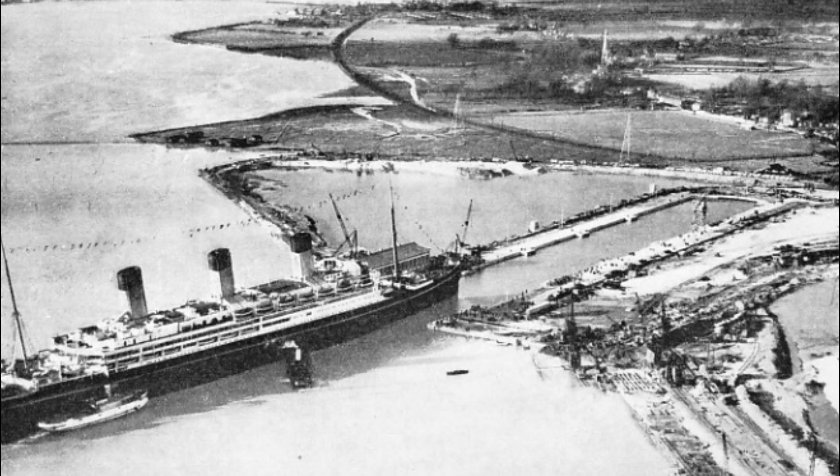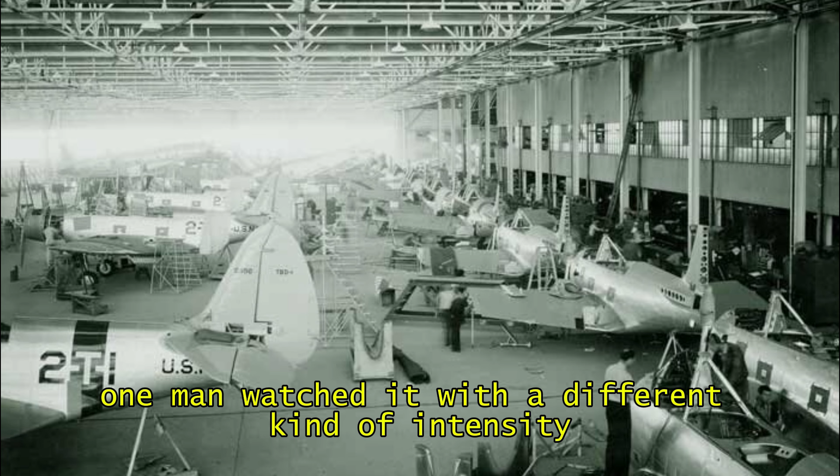Southampton, 1931. The tide was low along the River Itchen, and inside the Supermarine workshops a small crowd gathered around a sleek metal prototype resting on its trestles. The machine looked nothing like the biplanes dominating British airfields. Its wings seemed carved rather than assembled, its curves unusually clean, its structure almost arrogant in its simplicity. While visitors studied its unfamiliar shape, one man watched it with a different kind of intensity.

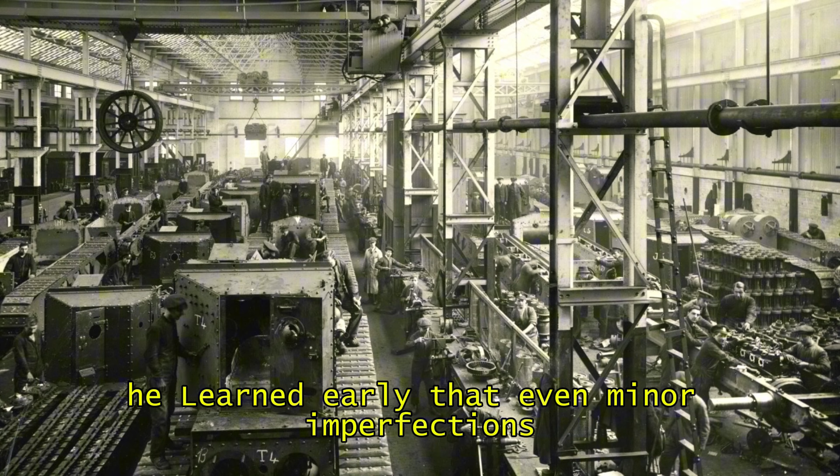R.J. Mitchell wasn't admiring a prototype. He was evaluating a future that few around him had even begun to imagine. Mitchell had already demonstrated that he understood speed better than most engineers of his generation. His seaplanes for the Schneider Trophy had torn across the water at record-breaking velocities, proving that aerodynamic discipline could defy expectations when applied without compromise. He learned early that even minor imperfections—a misaligned rivet, a poorly managed airflow transition, an unnecessary gram of weight—could turn victory into failure.

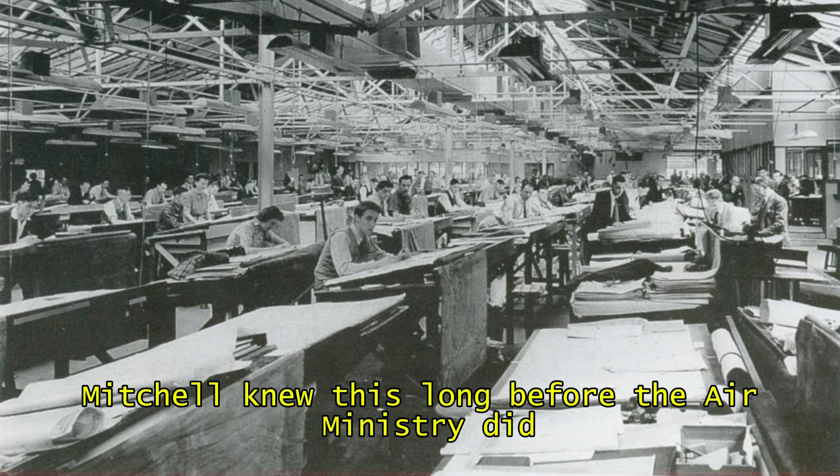These lessons shaped everything he designed, and by the early 1930s, Britain needed that mindset more urgently than ever. Aviation was shifting from wood and canvas biplanes to metal and engine physics. The next war would not wait for designers to catch up. Mitchell knew this long before the Air Ministry did. He was not an engineer who made decisions by instinct or emotion. To him, aircraft were problems expressed in three dimensions.

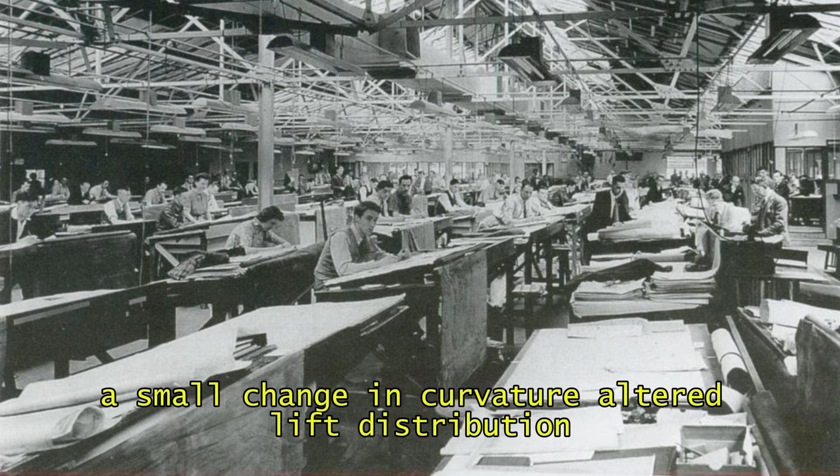A line drawn on a blueprint had consequences at full throttle. A small change in curvature altered lift distribution across an entire wing. A fraction of a degree in incidence made the difference between stability and disaster. Mitchell studied these relationships with the precision of a mathematician and the stubbornness of a craftsman who refused to accept good enough. He kept notebooks filled with airflow sketches, structural calculations, and handwritten annotations that revealed the mind of a man who trusted data more than promises.

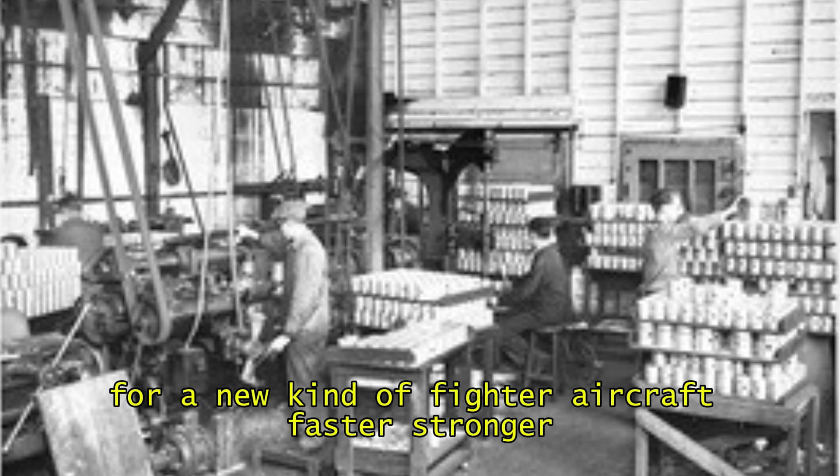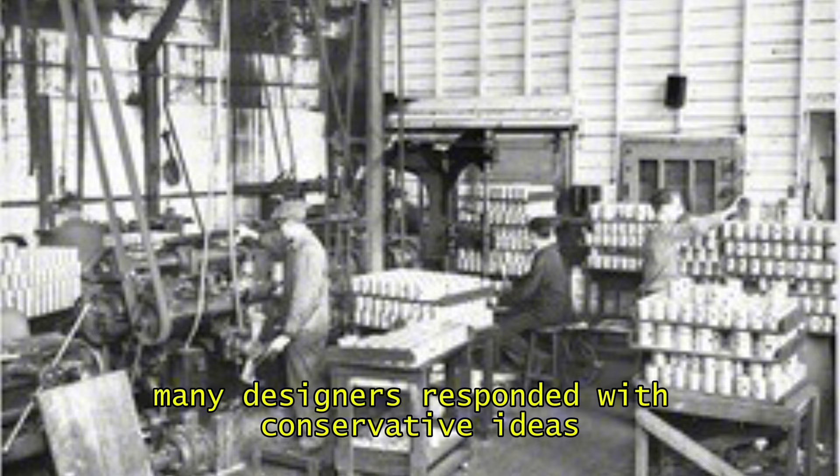He wasn't trying to outdesign other engineers. He was trying to outdesign the war he saw forming beyond the horizon. As tensions across Europe grew, the Air Ministry issued a requirement for a new kind of fighter aircraft—faster, stronger, able to climb rapidly, carrying sufficient firepower to challenge whatever Germany might produce. Many designers responded with conservative ideas, refining biplane concepts or proposing incremental improvements.

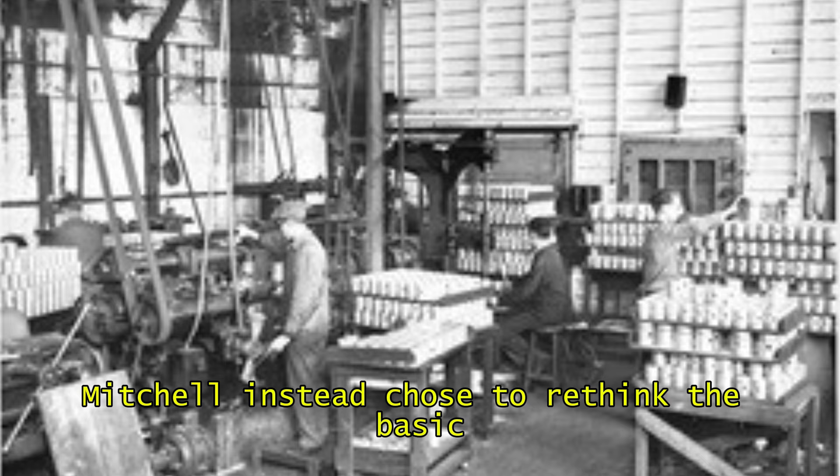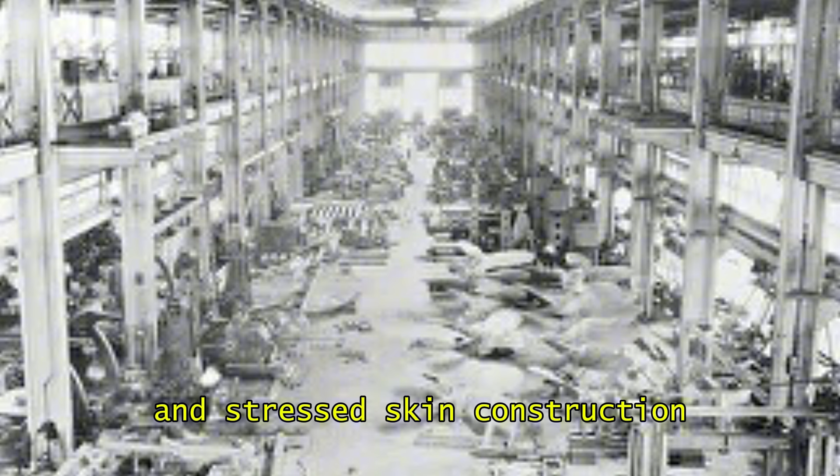Mitchell instead chose to rethink the basic geometry of the modern fighter. He studied low-drag fuselage forms, thin cantilever wings, retractable landing gear, and stressed skin construction. No single element was revolutionary on its own, but the combination hinted at a leap that Britain had never attempted in a military aircraft. Mitchell's early sketches showed wings that curved with deliberate precision, a fuselage tapering smoothly around its engine, and structural elements distributed to minimize unnecessary mass.

He was obsessed with airflow behavior at high speeds. He understood that drag was the enemy of performance, and his approach focused on eliminating every surface that didn't contribute directly to lift, stability, or cooling. He often arrived at the factory before sunrise, reviewing test results and making adjustments that seemed microscopic to casual observers, but transformed handling during flight.

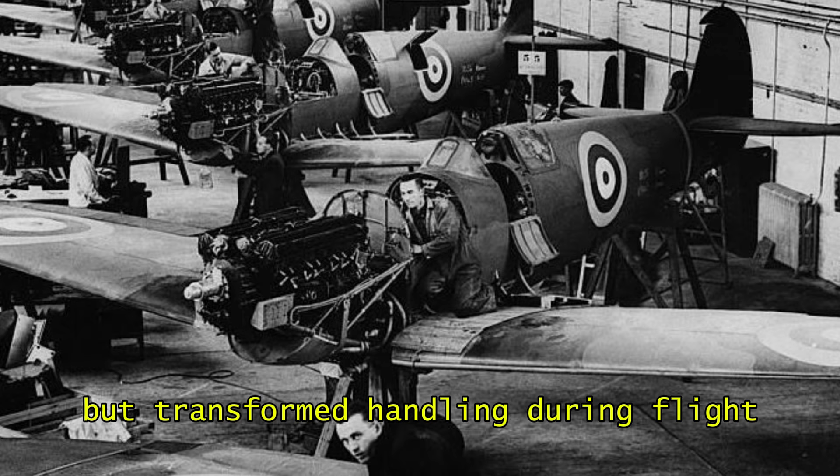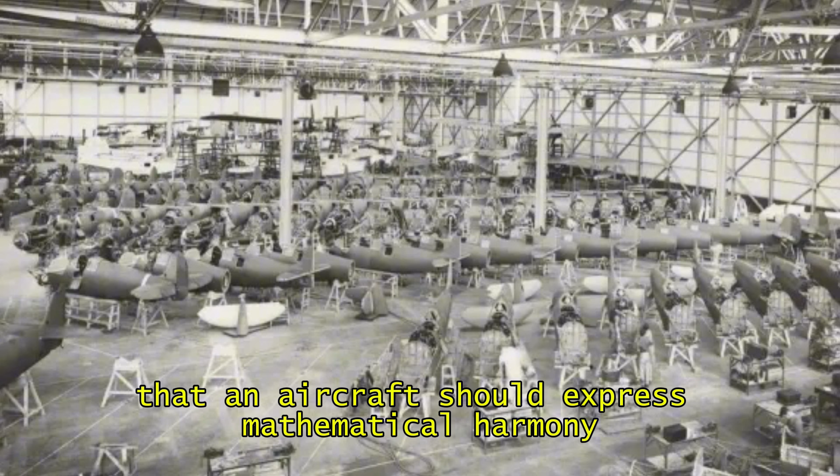Draftsmen described him as calm, focused, and methodical—a man who believed that an aircraft should express mathematical harmony when viewed from any angle. Even at this early stage, Mitchell sensed that Britain would need an aircraft capable of rising quickly into the path of incoming bombers, engaging escort fighters, and returning home with enough strength left to fight again the next day. Speed alone wasn't enough.

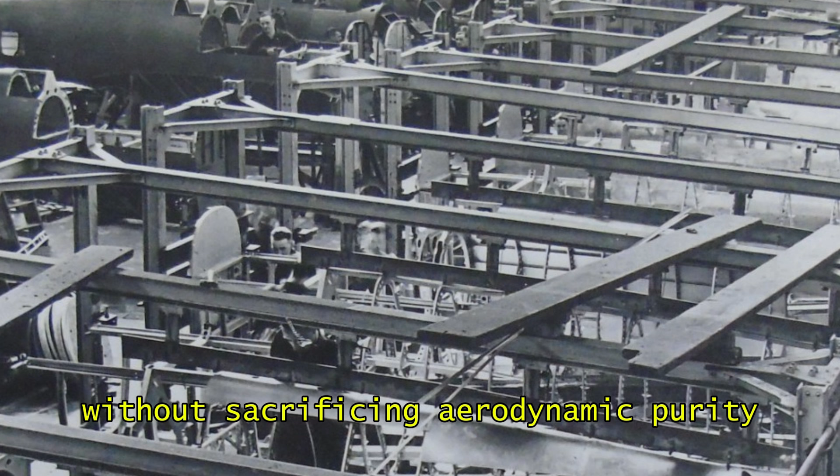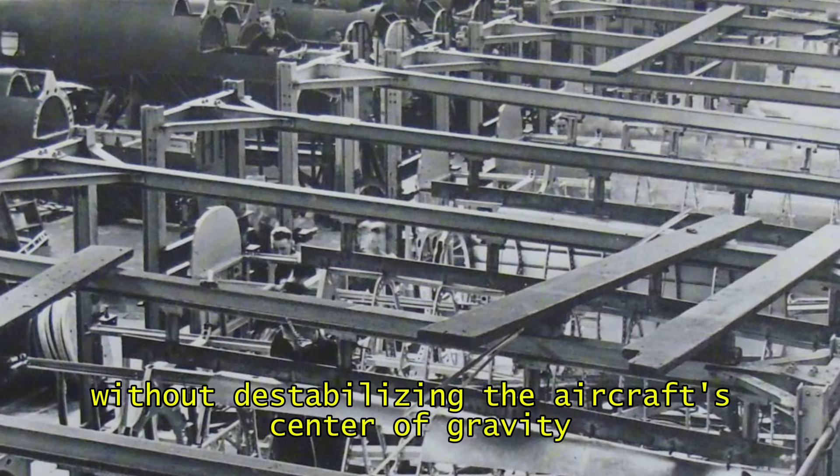The design needed structural honesty, the ability to withstand combat stress without sacrificing aerodynamic purity. Mitchell experimented with monocoque fuselage construction, new wing spars, and layouts intended to support heavy armament without destabilizing the aircraft's center of gravity. Every refinement brought him closer to a fighter that could change the balance of power in European airspace. Inside Supermarine, engineers began to notice that Mitchell's blueprints had a coherence absent from many contemporary designs. His aircraft didn't blend features from various sources.

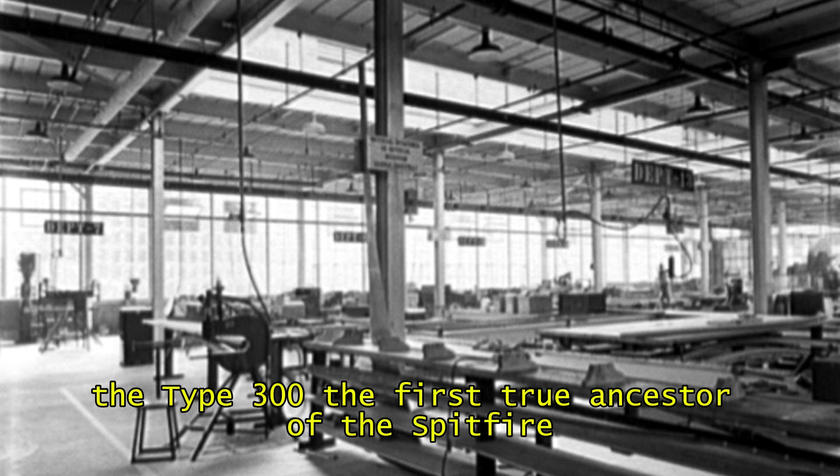They evolved logically from the physics he studied. When a test revealed a flaw, he corrected the geometry directly rather than compensating with patches or external additions. His aircraft weren't built through compromise. They were built through deliberate choice. This commitment to clarity would soon evolve into a machine that captured the attention of the Air Ministry—the Type 300, the first true ancestor of the Spitfire.

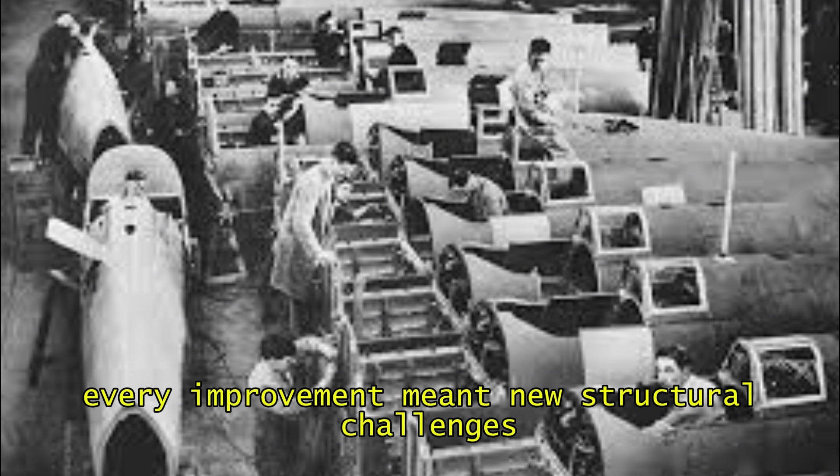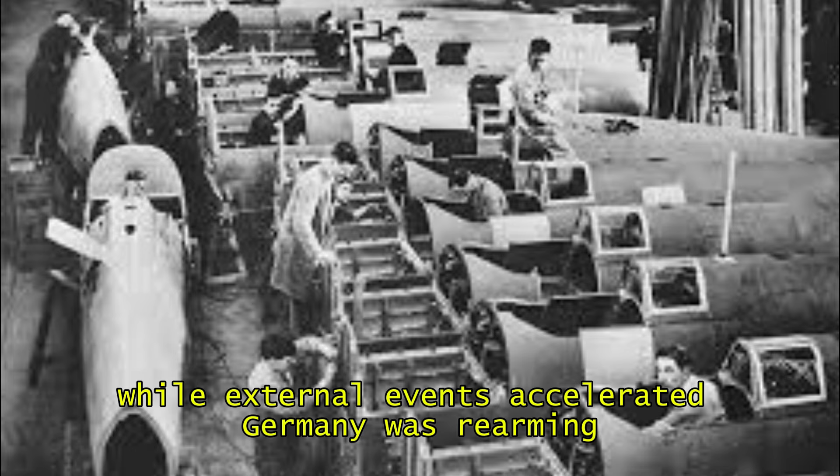But Mitchell also understood the cost of innovation. Every improvement meant new structural challenges, new stress calculations, and tighter margins for error. His team worked under pressure, refining the prototype while external events accelerated. Germany was rearming, and British intelligence warned of fighters and bombers designed with increasing sophistication.

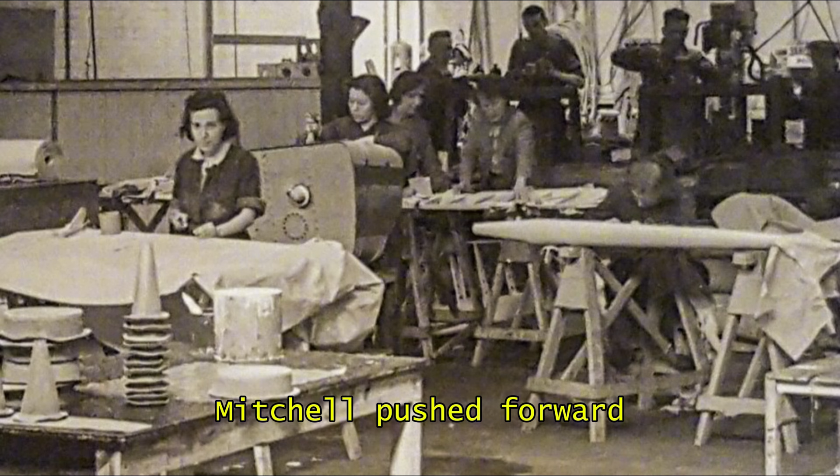Time was becoming a resource Britain could not replace. Mitchell pushed forward, balancing ambition with discipline, knowing that a future conflict would be decided in minutes of combat, shaped by years of engineering. As the final lines of the Type 300 took form, one question defined the next stage of his work. Could Mitchell's pursuit of aerodynamic precision deliver an aircraft capable of meeting the war Britain feared was coming? What breakthrough would transform his promising prototype into the fighter that would carry Britain through its darkest hour?

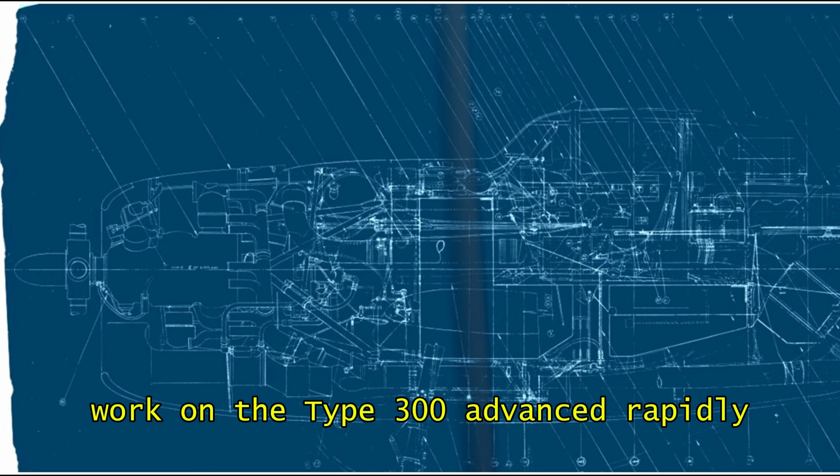Work on the Type 300 advanced rapidly, but the prototype still existed only as a sequence of evolving blueprints, stress diagrams, and airflow studies pinned across Mitchell's office walls. He knew the concept was promising, yet promise alone would not convince the Air Ministry.

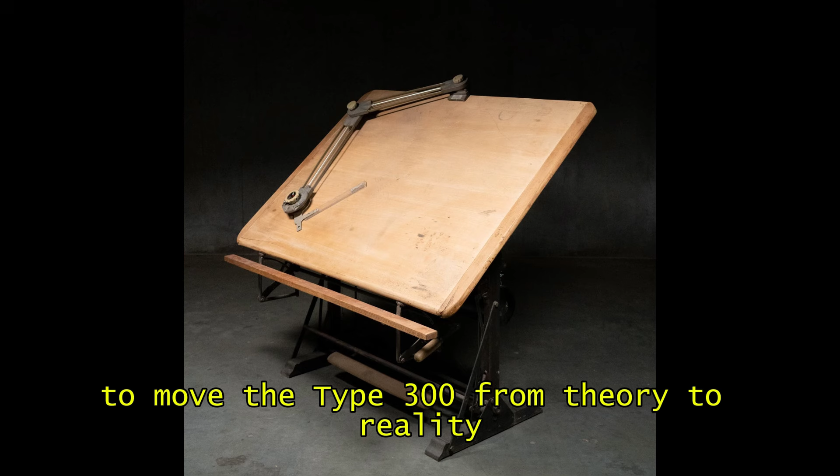Britain was in a transitional moment. Older aircraft were becoming obsolete overnight, and new designs carried risks that frightened conservative planners. For Mitchell to move the Type 300 from theory to reality, he needed to refine every aspect of the design until its purpose became undeniable.

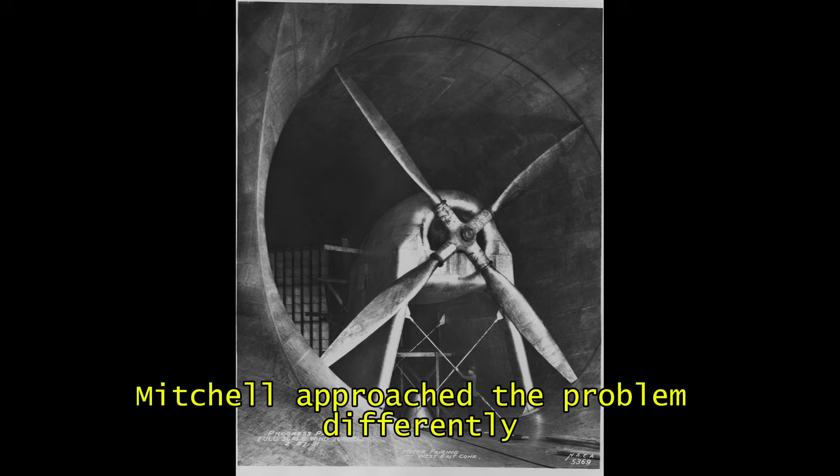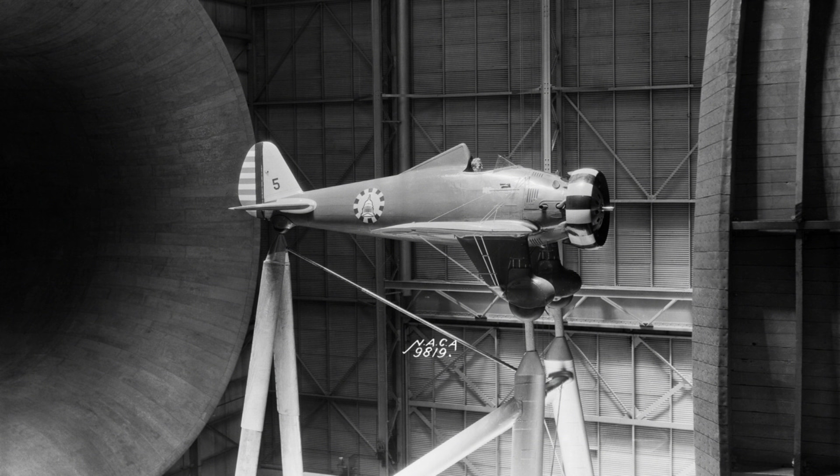His first focus was the wing. Most European fighters relied on thick, straight-edged designs that offered stability but sacrificed speed. Mitchell approached the problem differently. He shaped the wing like a curve drawn in a single uninterrupted motion, its thickness tapering smoothly from root to tip. This elliptical form was not aesthetic, it was mathematical.

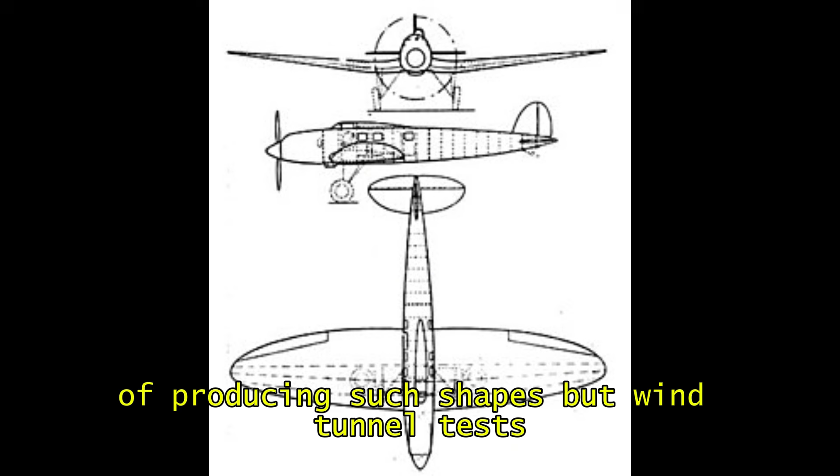It reduced induced drag, distributed lift more evenly, and allowed the aircraft to maneuver without the abrupt stalls common in many fighters of the era. Engineers studying the drawings initially questioned the practicality of producing such shapes, but wind tunnel tests confirmed that Mitchell's instinct was correct. The design promised higher efficiency during tight turns and reduced resistance during high-speed flight, giving the prototype a performance advantage before a single engine ever turned.

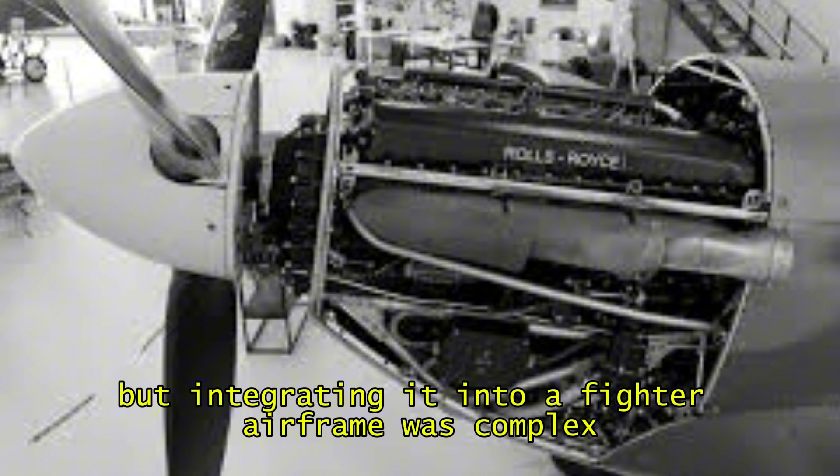Next came the challenge of housing the power plant. The new Rolls-Royce Merlin engine offered extraordinary potential, but integrating it into a fighter airframe was complex. Cooling, vibration, airflow intake, and weight distribution had to work in perfect harmony.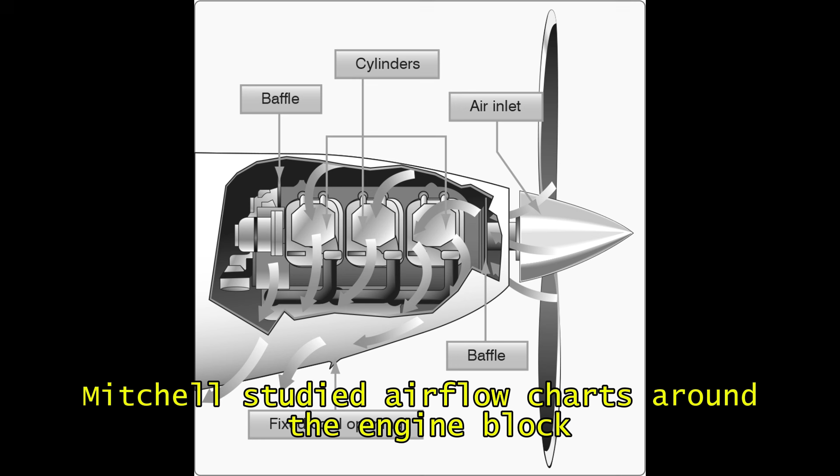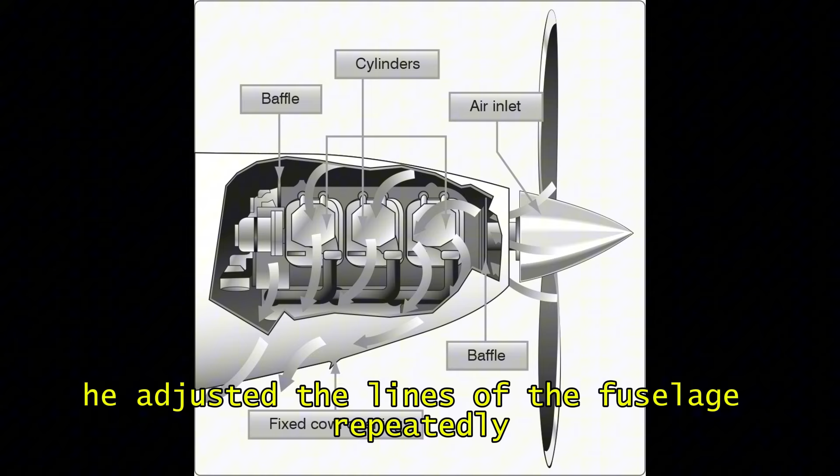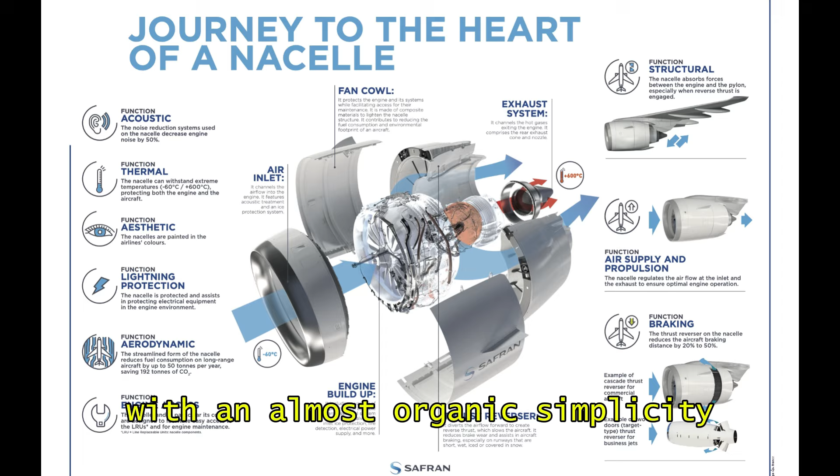Mitchell studied airflow charts around the engine block, observing how pressure fields shifted with minor changes to the cowling's curvature. He adjusted the lines of the fuselage repeatedly, ensuring that the Merlin's power translated into usable speed rather than wasted turbulence. His design integrated the engine with an almost organic simplicity, reducing drag at the nose and creating a smooth transition into the aircraft's body.

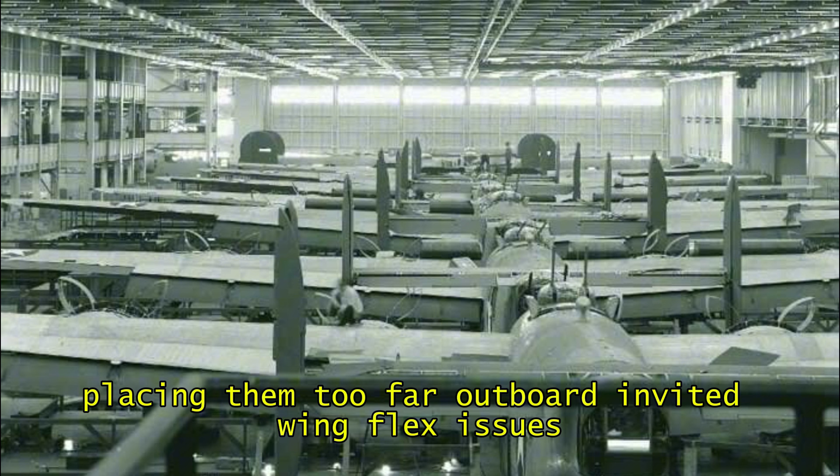Mitchell also recognized that speed without firepower was meaningless. The Air Ministry required 8 machine guns mounted in the wings, a configuration that imposed both structural and aerodynamic complications. Mounting the guns too close to the fuselage risked destabilizing recoil forces. Placing them too far outboard invited wing flex issues.

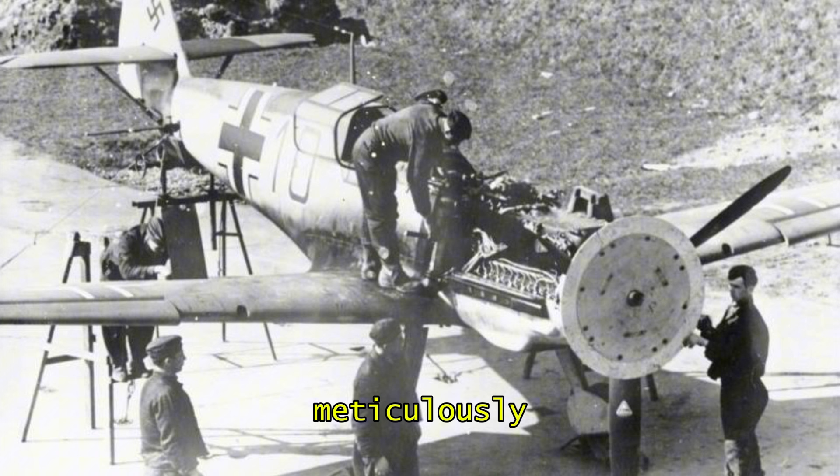Mitchell calculated the precise points where the wing spar could support the weight without compromising rigidity. The gun ports were aligned along airflow paths, optimized to prevent excessive drag. Even the placement of ammunition boxes was evaluated meticulously, with diagrams mapping how weight would shift as rounds were expended during combat. While the technical work intensified, the broader environment around Supermarine grew increasingly urgent.

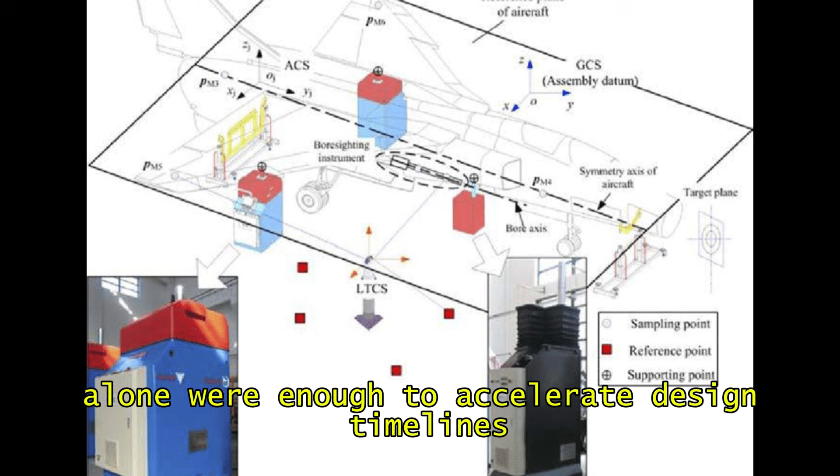Intelligence reports indicated that Germany was producing fighters with advanced engines and all-metal airframes. No one yet knew the capabilities of the Bf 109, but rumours alone were enough to accelerate design timelines. Mitchell responded by tightening the development cycle.

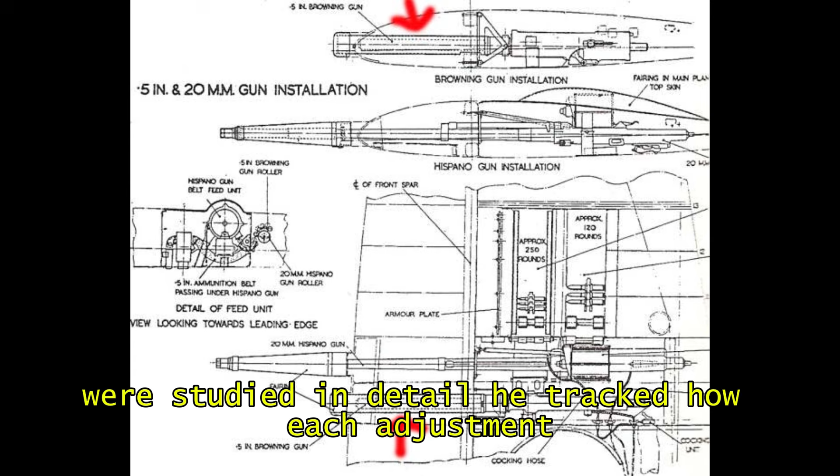Test components were fabricated quickly and inspected with uncompromising standards. Structural frames were assembled and disassembled repeatedly, as material limits were studied in detail. He tracked how each adjustment influenced the aircraft's centre of gravity, lift characteristics, and stress distribution during high-load manoeuvres.

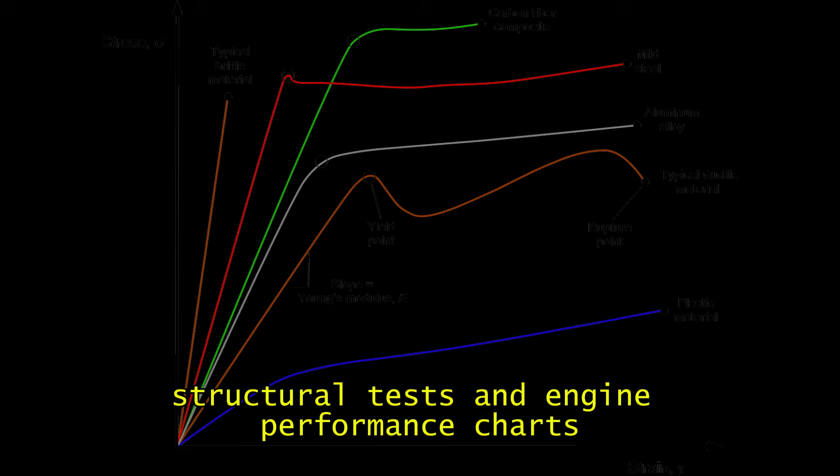Despite the pressure, Mitchell avoided shortcuts. His approach was systematic, grounded in evidence rather than speculation. When a design question emerged, he consulted wind tunnel data, structural tests, and engine performance charts until the answer revealed itself through numbers rather than opinion. Draftsmen recalled that he often worked late into the night, pencil marks accumulating across revised drawings until the geometry reached a state he considered honest.

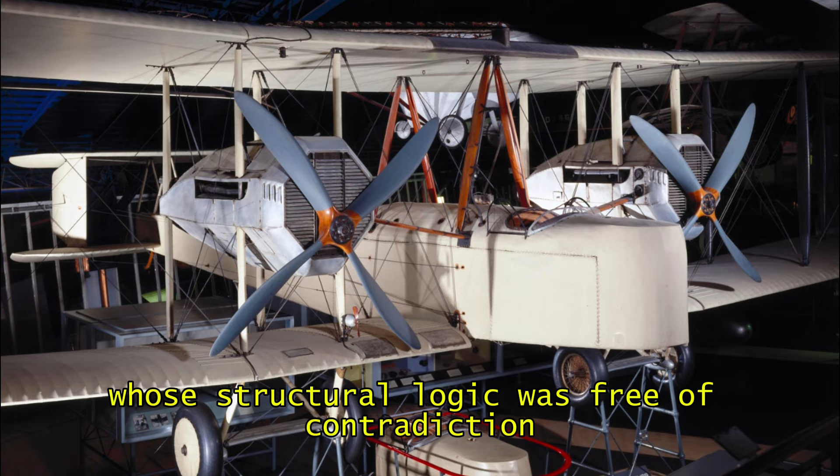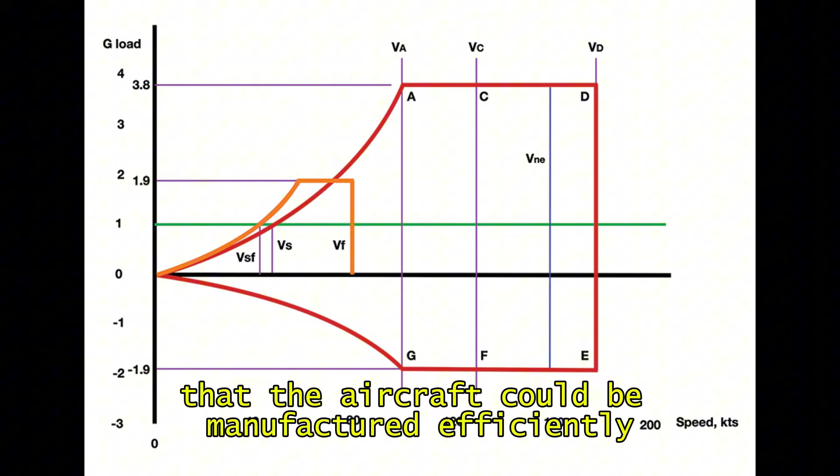He used that word often to describe an aircraft whose structural logic was free of contradiction. As the prototype neared approval, Mitchell understood that innovation alone would not secure the Air Ministry's support. He needed to demonstrate that the aircraft could be manufactured efficiently and maintained under operational strain.

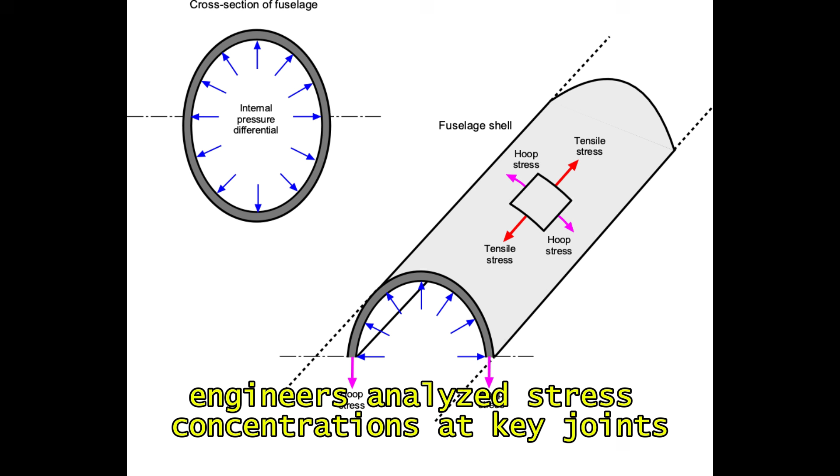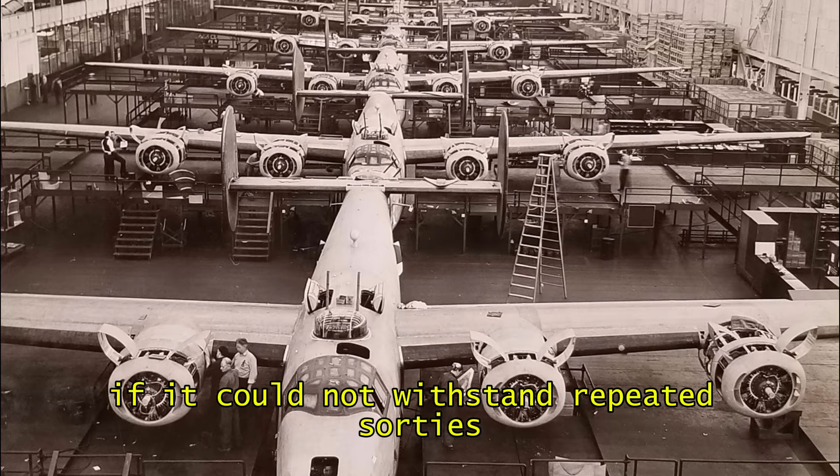He reviewed rivet patterns, simplified access panels, and optimized the internal structure for rapid repair. Engineers analyzed stress concentrations at key joints, reinforcing them without adding unnecessary weight. Mitchell believed that a fighter's performance meant little if it could not withstand repeated sorties and absorb battle damage without catastrophic failure.

The Type 300 was designed not only to excel in controlled tests, but to survive the unpredictable reality of war. By mid-1934, the aircraft's design reached a level of coherence that impressed even skeptical officials. The Air Ministry recognised that the prototype represented more than incremental progress. It was a leap into a new generation of fighter architecture.

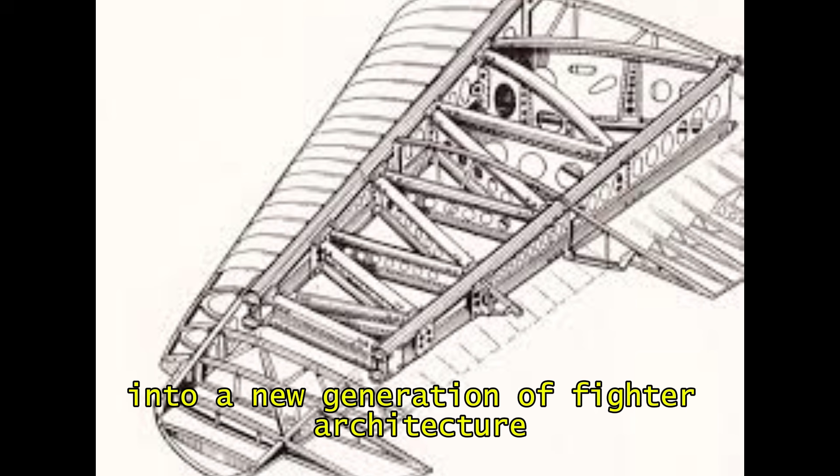The combination of the Merlin engine, the elliptical wing, and Mitchell's aerodynamic refinements produced a profile unmatched by anything currently flying under British colours. Approval for the first prototype was granted, marking a turning point in the project. Construction began soon after, and momentum shifted from theoretical perfection to practical engineering.

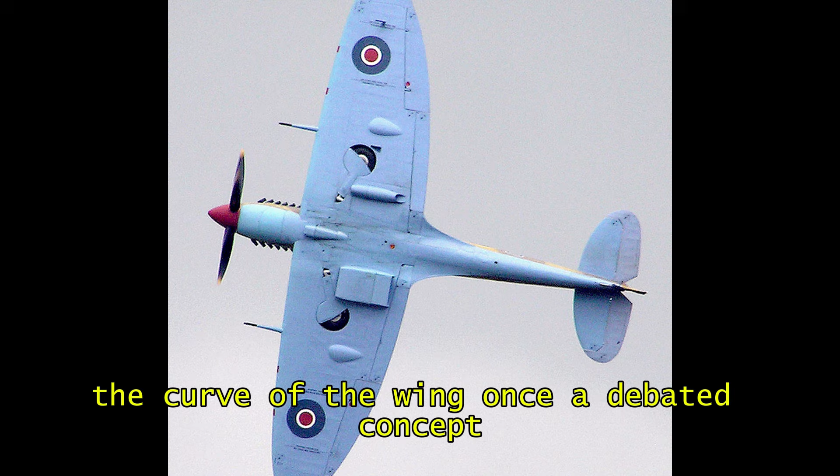Frames were assembled on the workshop floor. Sheets of metal were shaped and riveted into position. The curve of the wing, once a debated concept, became a tangible structure stretching across the hangar.

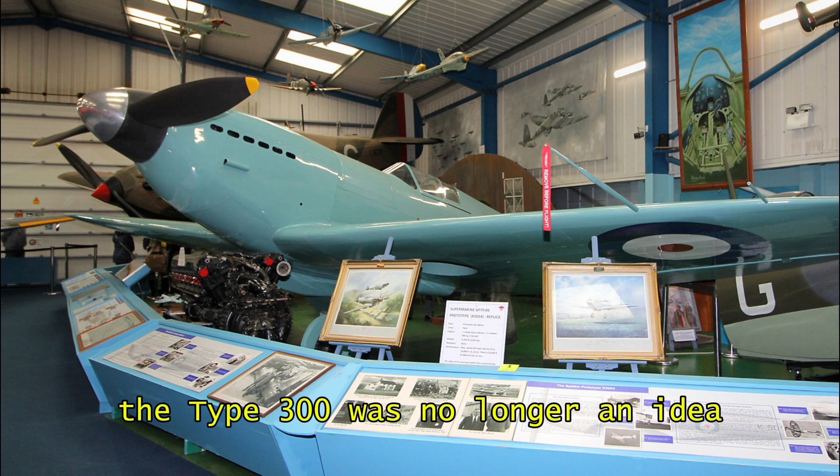Mitchell supervised every stage, observing the alignment of spars, inspecting control surfaces, and confirming that the manufactured components remained faithful to his calculations. The Type 300 was no longer an idea. It was becoming a physical machine, capable of challenging the emerging threats across Europe.

Yet, even as the aircraft took shape, Mitchell knew the greatest tests still lay ahead. Once it entered the air, every assumption, every calculation, and every decision would face scrutiny from the unforgiving physics of flight. What challenges would the prototype encounter once it lifted from the runway and met the sky for the first time?

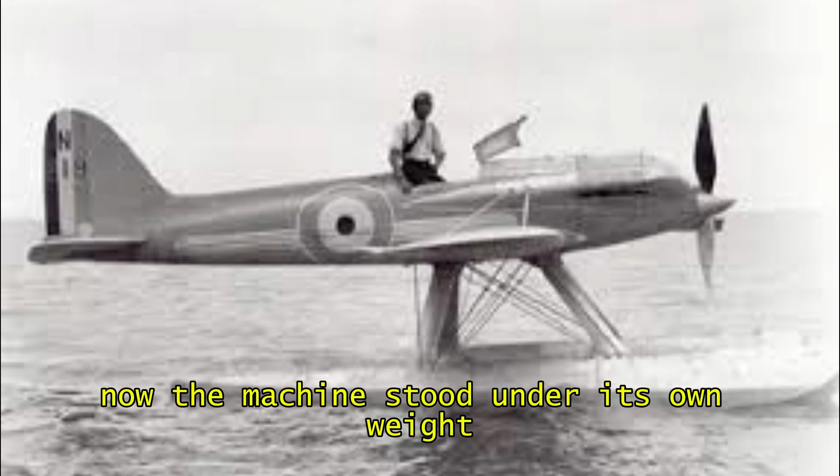The first prototype of the Type 300 rolled out onto the tarmac, with a sense of anticipation that spread across the Supermarine team. For months, the design had lived only in diagrams, airflow charts, and Mitchell's relentlessly revised sketches. Now the machine stood under its own weight, metal skin shimmering under the morning light, its elliptical wings stretching outward, like a promise waiting to be tested.

The moment the wheels touched the runway for trials, engineering moved from theory into the unforgiving realm of flight. Early tests revealed exactly why Mitchell refused to rely on instinct alone. The aircraft demonstrated impressive speed, but handling required refinement. Control forces at high velocity felt heavier than predicted, and airflow separation along the wing roots appeared earlier than wind tunnel data suggested. Pilots reported that the aircraft climbed quickly but demanded precise inputs to maintain stability during tight turns.

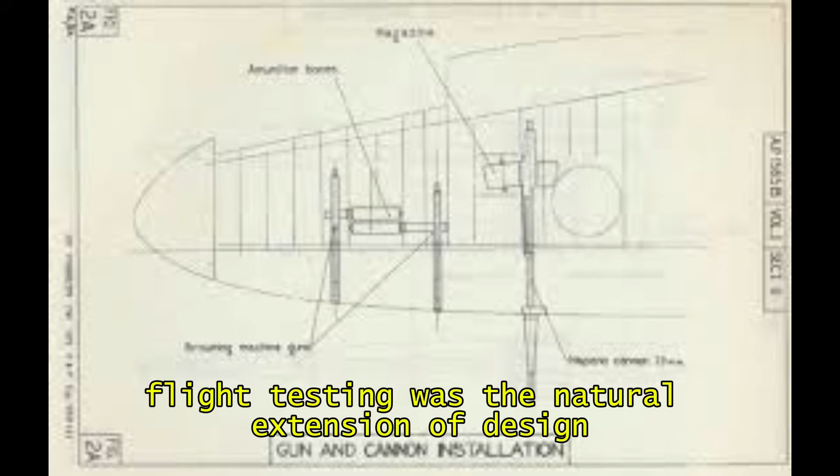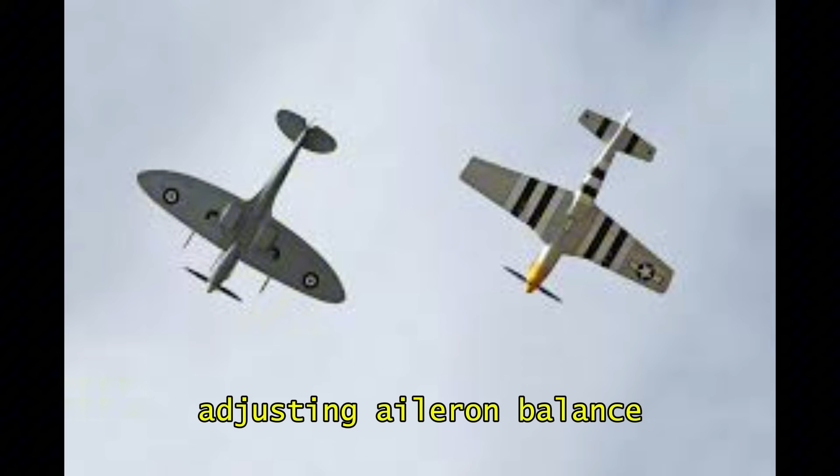For Mitchell, none of this was discouraging. Flight testing was the natural extension of design, the moment where numbers met reality. He returned to the workshop with renewed focus, revising control linkages, adjusting aileron balance, and narrowing gaps between surfaces to eliminate unnecessary turbulence. The Merlin engine brought its own set of challenges.

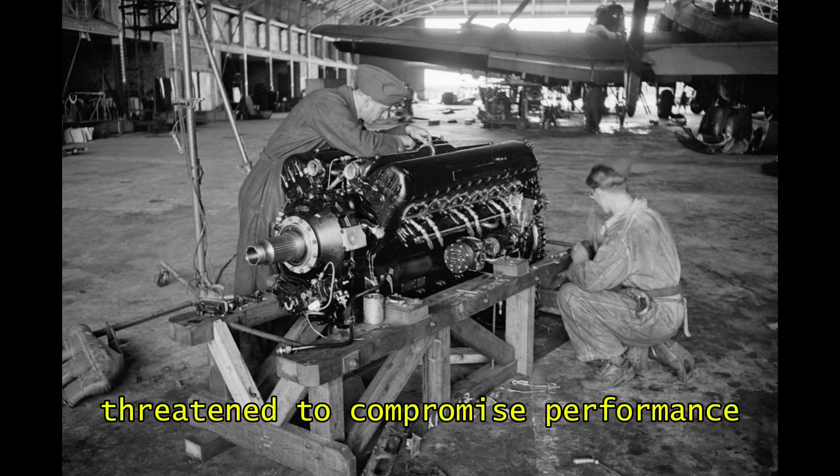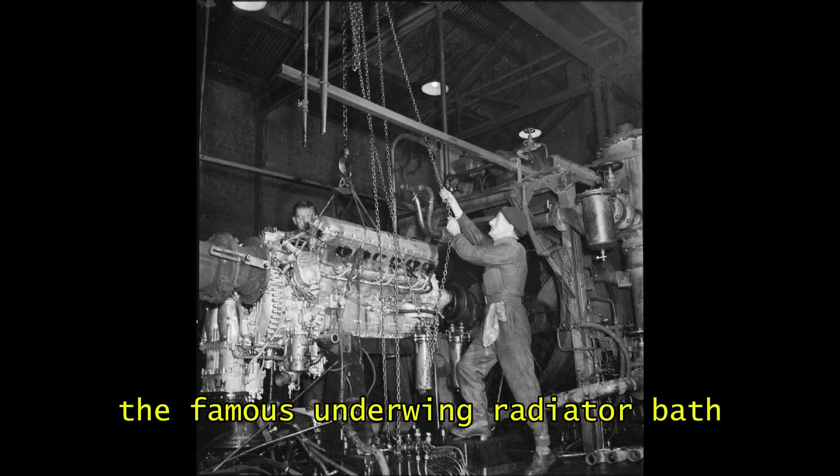Its power was essential, but heat build-up during extended climbs threatened to compromise performance. Mitchell studied temperature profiles across the fuselage, working with Rolls-Royce to reshape coolant inlets and reposition radiators to maintain efficiency without adding drag. The famous underwing radiator bath, later recognized as a hallmark of the Spitfire's silhouette, evolved from these experiments. Its shape balanced cooling requirements with aerodynamic cleanliness, turning a functional necessity into a performance advantage.

Each test flight returned with new data. Engineers charted vibration frequencies, stress variations across the wing spars, and pressure differentials along the fuselage. Mitchell checked every curve against his original models. When discrepancies appeared, he traced the source with methodical patience.

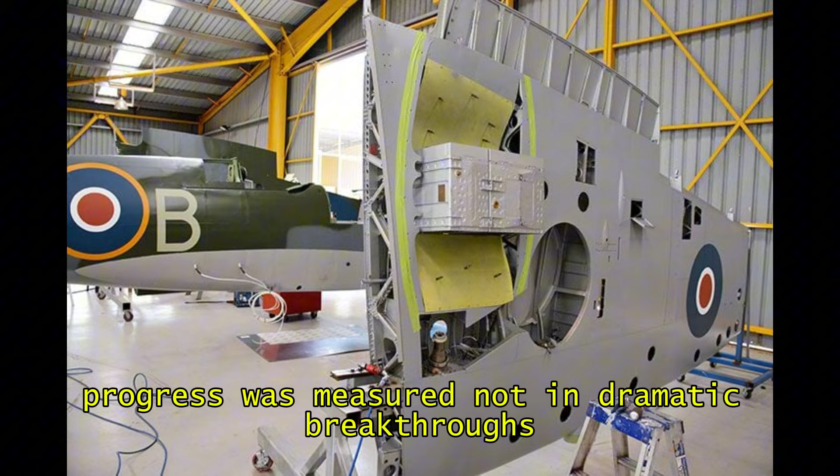A slight flutter at high speed led to adjustments in trailing edge stiffness. A minor yaw tendency during rapid throttle changes triggered a re-evaluation of tail geometry. Progress was measured not in dramatic breakthroughs, but in steady, disciplined refinement, the process that defined all of Mitchell's most successful designs.

As the prototype matured, political urgency intensified. Reports from the continent indicated that Germany had fielded the Messerschmitt Bf 109, a fighter with advanced aerodynamics and a powerful inline engine. Britain needed a competitor, and it needed it quickly.

The Air Ministry monitored the Type 300's progress with growing interest, pushing for accelerated development without sacrificing reliability. Mitchell understood the pressure but refused to compromise structural integrity for speed. A fighter that excelled on paper yet failed under operational strain would serve no purpose.

His aim was not to surpass the enemy for a few months. It was to give Britain a design that could evolve throughout the war.

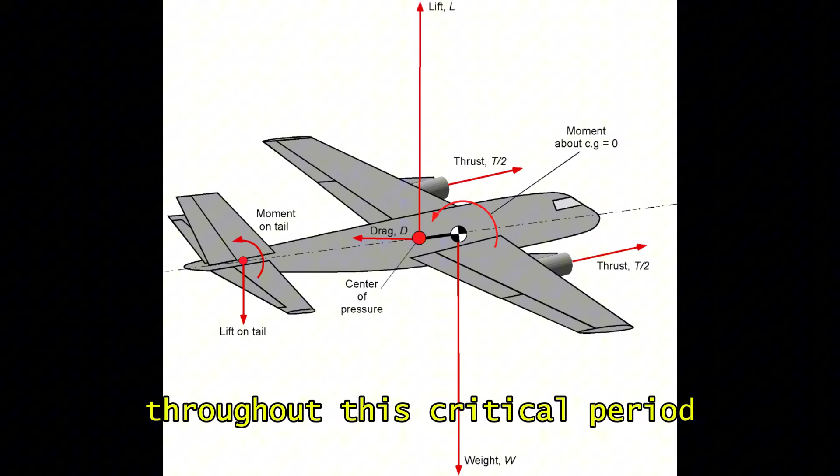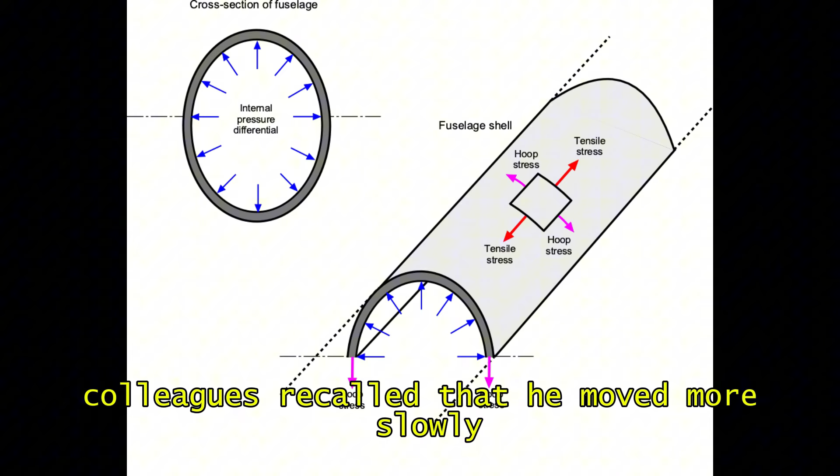Throughout this critical period, Mitchell's health began to deteriorate. A diagnosis he had kept private from most colleagues now cast a shadow over his work. Pain made long hours more demanding, yet he continued to oversee tests, review engineering revisions, and guide every refinement. Colleagues recalled that he moved more slowly but with the same intensity in his eyes.

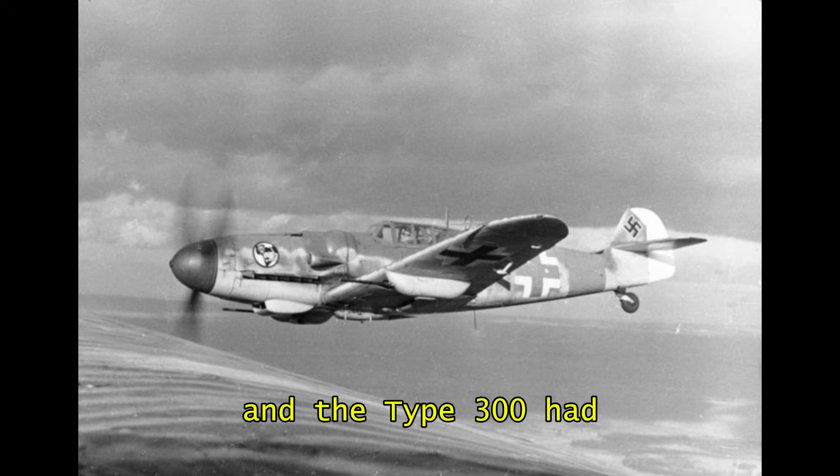Engineering was not simply his profession. It was the structure through which he viewed the world, and the Type 300 had become the culmination of that vision. Even as treatment and fatigue limited him, his presence in the workshop remained constant.

The aircraft improved with each iteration. Its turn performance sharpened, its climb rate increased, and its high-speed behaviour stabilised. Mitchell focused particularly on the harmony between engine, wing, and control surfaces, a triad he believed defined all great fighters.

Test pilots began reporting impressions that hinted at something rare, a machine that was not only fast, but intuitive, responsive, almost instinctive to fly. Mitchell viewed these comments cautiously. He preferred numbers to impressions, but the emerging picture aligned with his predictions. The design was reaching a point of equilibrium where aerodynamic efficiency and mechanical reliability supported one another instead of competing.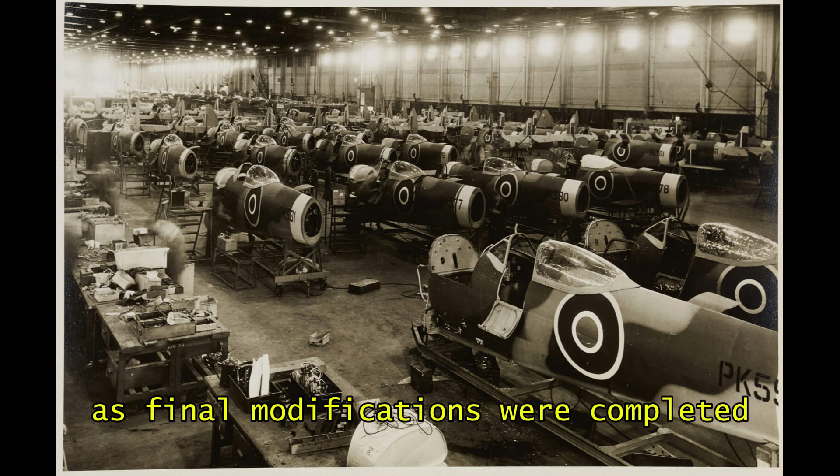As final modifications were completed, Supermarine prepared for official trials. The Type 300 faced assessments that measured structural strength, agility, stability under various loadouts, and high-altitude performance. Mitchell observed from the sidelines, watching the aircraft he had shaped through years of disciplined work rise into the sky with purpose.

Trials confirmed what his calculations had suggested. The prototype exhibited exceptional potential. It accelerated cleanly, maintained energy in sustained climbs, and delivered firing stability superior to competing British designs.

Yet for Mitchell, success was not defined by tests alone. He evaluated the aircraft's ability to adapt to future improvements. Could the airframe accept new engines? Could the wing structure support increased armament? Could the fuselage handle rapid manufacturing under wartime conditions? These questions mattered as much as raw performance.

Britain needed a fighter that would not only win the opening battles, but continue evolving as the conflict escalated. The Type 300 offered that flexibility.

As approval moved closer, the true transition began. The prototype would soon leave the stage of concept validation and enter the demanding world of full-scale production. Factories, supply lines, material planning, and workforce expansion would now determine the aircraft's future.

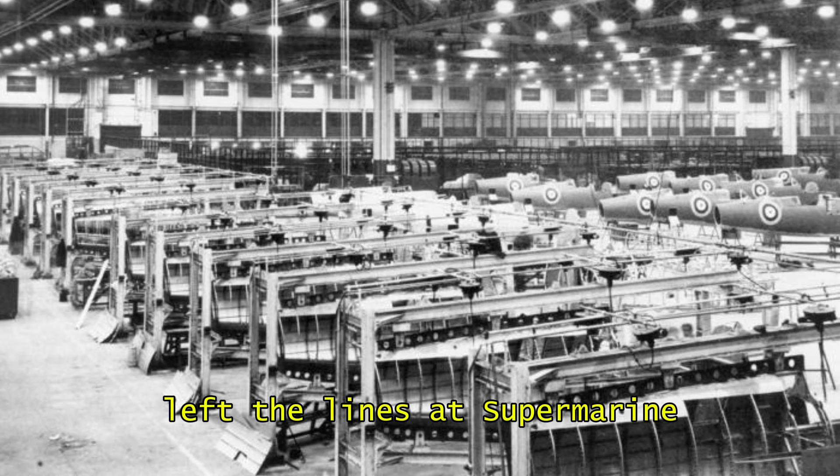When the first production models of the Spitfire left the lines at Supermarine, Britain stood on the threshold of a conflict that would test every assumption behind Mitchell's work.

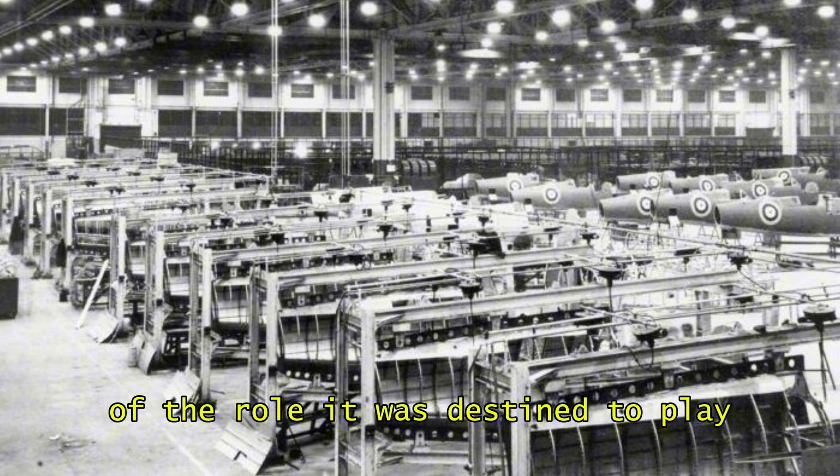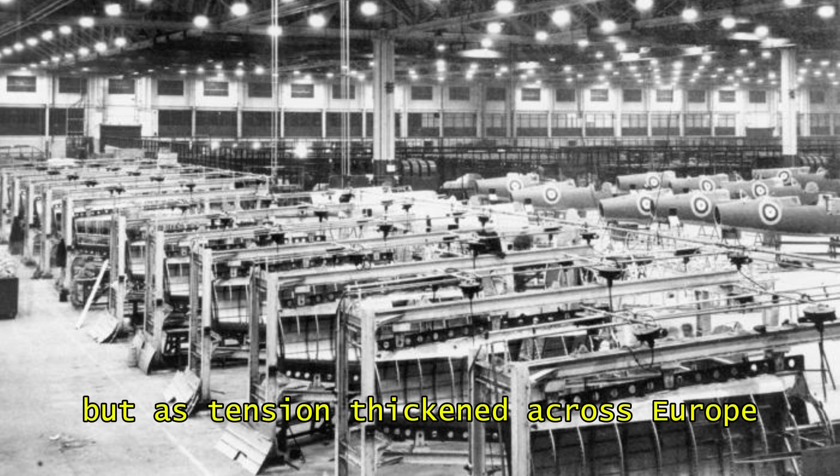The aircraft entered service quietly, with no grand announcements and no immediate recognition of the role it was destined to play. Pilots trained, ground crews adapted to the new structure, and engineers studied how the machine behaved under operational strain. But as tension thickened across Europe and war finally erupted, the Spitfire's true value began to emerge.

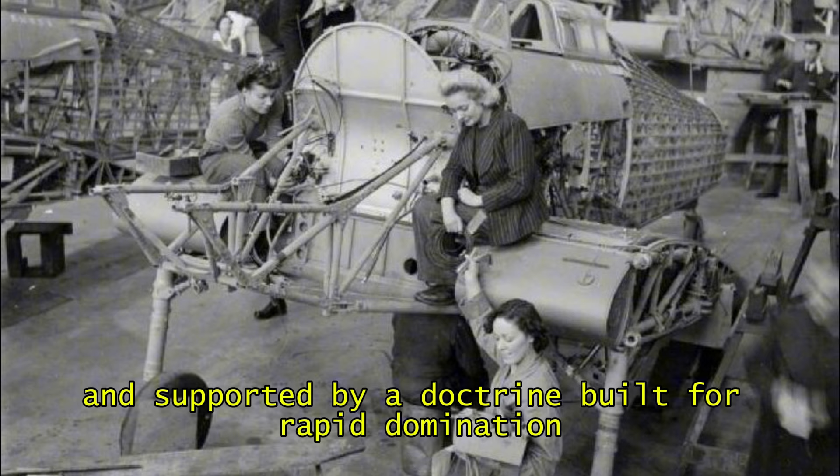Germany's fighters were fast, aggressive, and supported by a doctrine built for rapid domination. Britain needed a machine capable of meeting that challenge head-on, and Mitchell's design prepared the RAF in ways few fully understood. The Spitfire distinguished itself first not by raw speed, but by the precision of its aerodynamic balance.

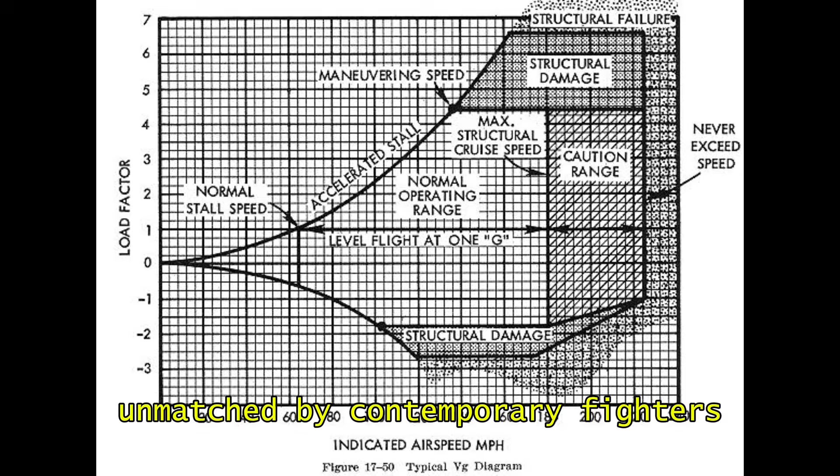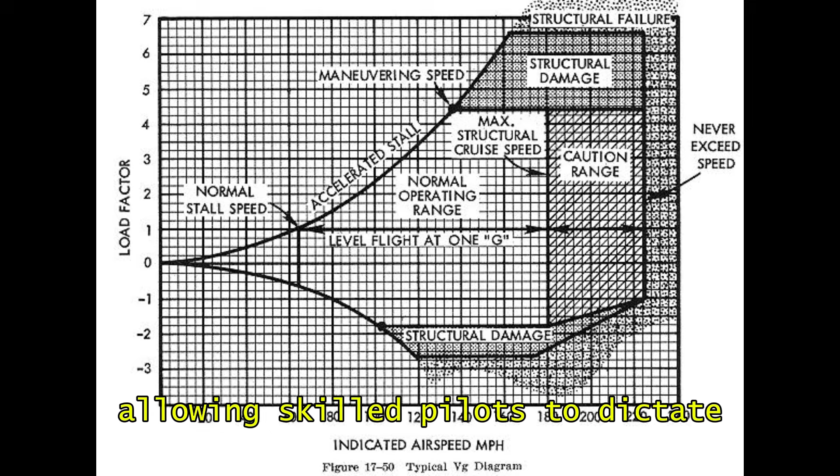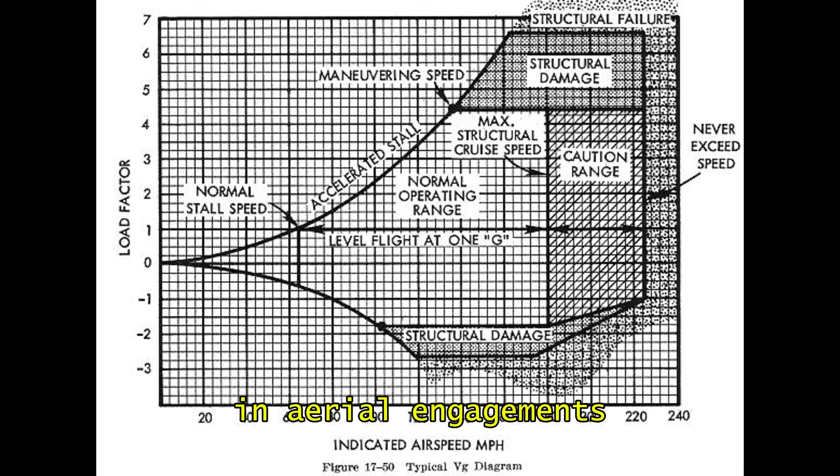Pilots discovered that the elliptical wing delivered a turning performance unmatched by contemporary fighters. Whereas many aircraft lost stability during aggressive maneuvers, the Spitfire maintained control, allowing skilled pilots to dictate the geometry of combat. Energy retention during climbs proved exceptional, enabling rapid altitude changes that determined life or death in aerial engagements. These traits were not accidental.

They were the direct result of Mitchell's disciplined approach. The wing's geometry, the fuselage's curvature, and the distribution of internal structure converged to create a fighter that translated theoretical predictions into battlefield advantage.

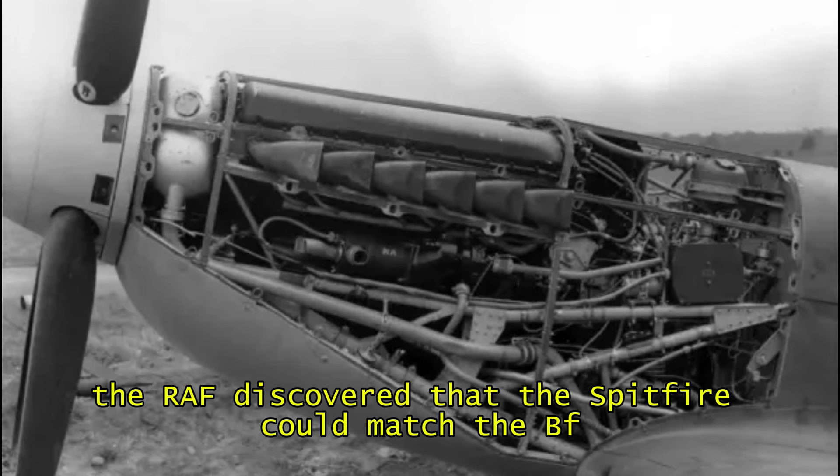As the Luftwaffe advanced through Western Europe, news of the Bf 109's combat effectiveness spread quickly. German fighters dominated the skies over Poland and France, and many analysts feared Britain would face the same fate. But when British and German aircraft finally met over the Channel, the RAF discovered that the Spitfire could match the Bf 109 in speed and surpass it in manoeuvrability.

The Merlin engine provided strong acceleration, while the aircraft's aerodynamic purity allowed pilots to hold tighter turns and recover energy more efficiently. Even the visibility from the cockpit, something Mitchell had refined through careful shaping of the canopy and fuselage, gave pilots an edge during fast-paced engagements.

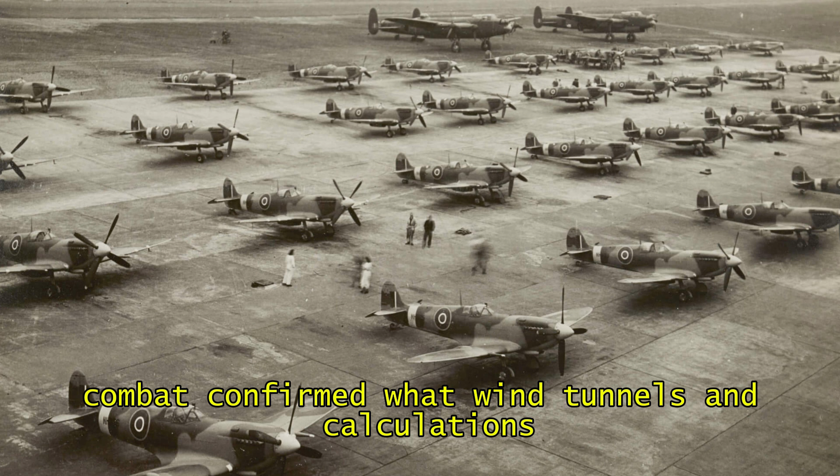Combat confirmed what wind tunnels and calculations had suggested. Mitchell's fighter operated as a coherent whole, each component supporting the others with rare consistency.

But the Spitfire's impact extended beyond one-against-one encounters. Its structure proved resilient under stress, allowing ground crews to repair damage quickly and return aircraft to service. The airframe accommodated incremental modifications without losing performance, enabling engineers to introduce new radiators, armament adjustments, and engine upgrades as the war evolved. This adaptability was critical.

Germany refined its aircraft continuously, and the RAF needed a platform capable of matching that pace. Mitchell had not lived to see the war unfold, but his insistence on structural honesty, designing an airframe that could withstand refinement rather than break under it, ensured that the Spitfire remained competitive through every phase of the conflict.

During the Battle of Britain, the world witnessed the full weight of Mitchell's achievement. German bombers swept across the Channel with fighter escorts designed to overwhelm British defences. Yet the Spitfire's climb rate, turn radius, and overall responsiveness allowed RAF pilots to intercept and challenge the enemy before they reached their targets.

While the Hurricane bore the bulk of bomber interceptions, the Spitfire neutralised the Bf-109 threat, preventing German fighters from achieving air superiority.

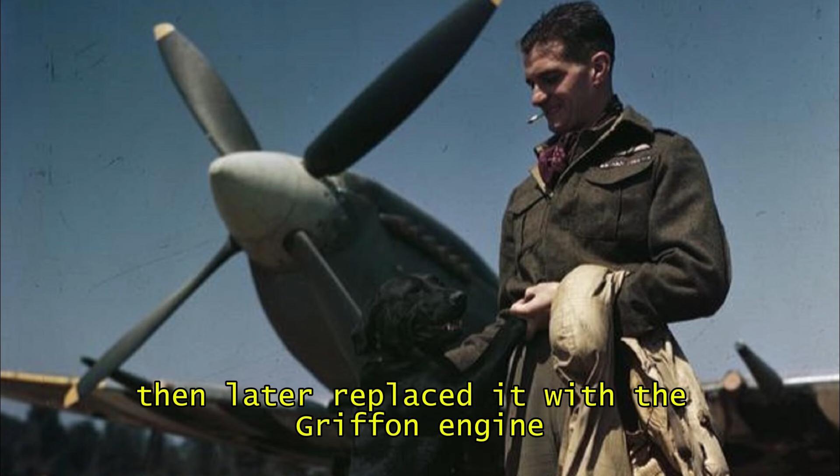As the war progressed, the Spitfire continued to evolve. Engineers introduced more powerful Merlin variants, then later replaced it with the Griffon engine, significantly increasing thrust and high-altitude performance. The airframe absorbed these changes without losing its defining qualities.

Wing modifications allowed the installation of cannons, clipped configurations improved roll rate, and reconnaissance versions reached altitudes beyond the reach of enemy fighters. Each iteration reflected Mitchell's original design philosophy: build a fighter with the structural integrity to grow, adapt, and meet challenges unknown at the time of creation.

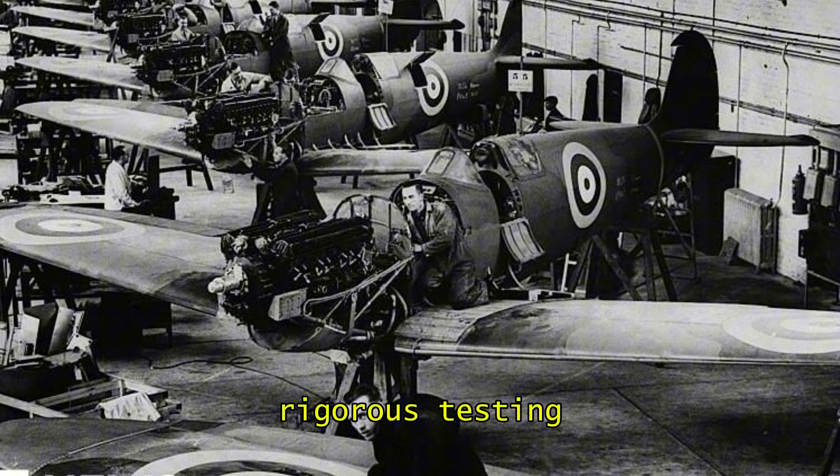Behind the scenes, engineers often acknowledged that the Spitfire felt engineered with foresight uncommon in military aviation. Mitchell's approach, combining aerodynamic theory, rigorous testing, and an uncompromising pursuit of balance, produced a machine that never stopped being relevant, even as technology accelerated.

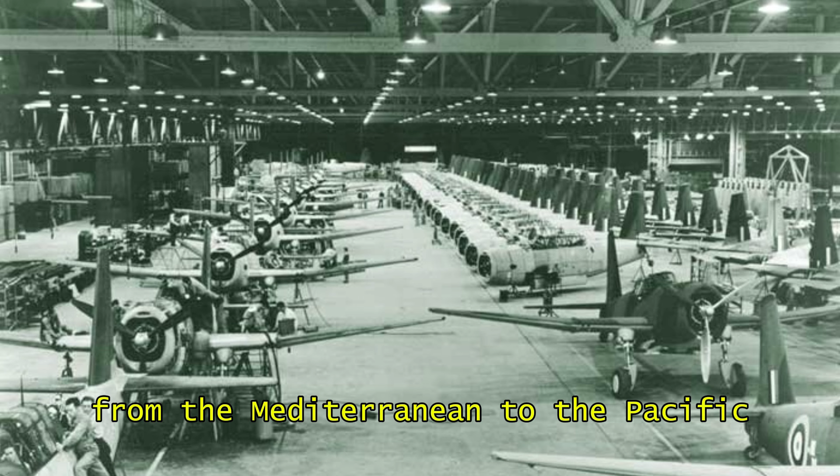The RAF eventually deployed Spitfires across multiple theatres, from the Mediterranean to the Pacific, confirming the aircraft's versatility under vastly different conditions. Britain's strategic position improved not only through tactics and training, but because Mitchell had delivered a tool capable of elevating the RAF's operational potential across the entire war.

By the time the conflict ended, the Spitfire had earned a place among the most influential aircraft ever built. It did not win the war alone, but it shaped its direction, protected Britain during its most vulnerable moments, and demonstrated how disciplined engineering could alter the trajectory of national survival.

Mitchell did not live to see this legacy, yet every sortie flown during the war carried the signature of his work: the precision, the aerodynamic clarity, the refusal to accept compromise.

His story is not only about a fighter aircraft, it is about an engineer who transformed principles into power, theory into survival, and geometry into a strategic advantage felt on every front of the conflict.

As the war closed and the world entered a new era of aviation, one question framed the memory of his achievement: how would the future of aircraft design continue to be shaped by the principles Mitchell embedded so deeply into the machine that carried Britain through its darkest hour?